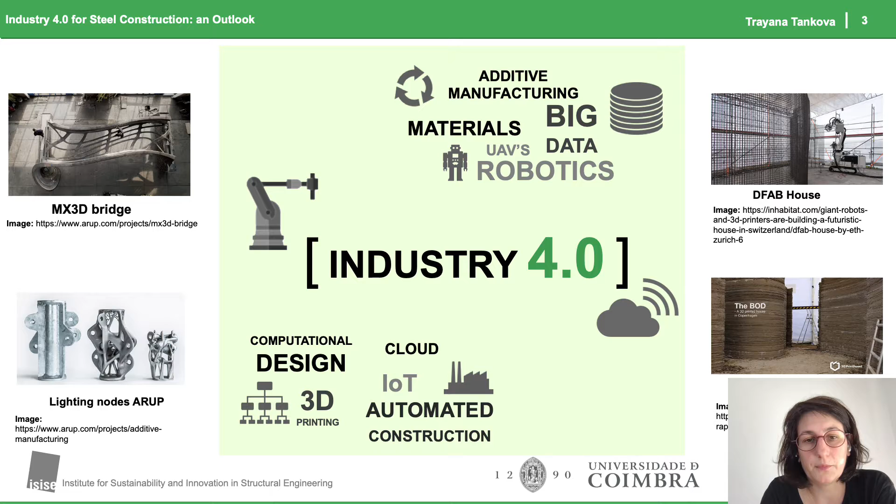Previously, we had work from Arup, where they showed how a conventional piece can be optimized and executed using this new technology. We have the digital fabrication in Zurich, where they also try to incorporate the robots in construction. And we also have several examples of 3D printed concrete structures.

We do also have building information modeling and digital twins, which allow us to have the three-dimensional model of the building, help interaction between the different specialities, and help avoiding problems in this interaction. This is also very useful at the construction site, where the teams can see how things can be executed, and this can be coupled with virtual reality, which is already available.

For example, from Trimble, where you can see the on-site progress of your building using this virtual reality and augmented reality. We do also have the possibility of parametric modeling, where we can easily change the length and height and whatever parameter we would like in our model, and in this way optimizing the solution, or introducing changes at any time of the process.

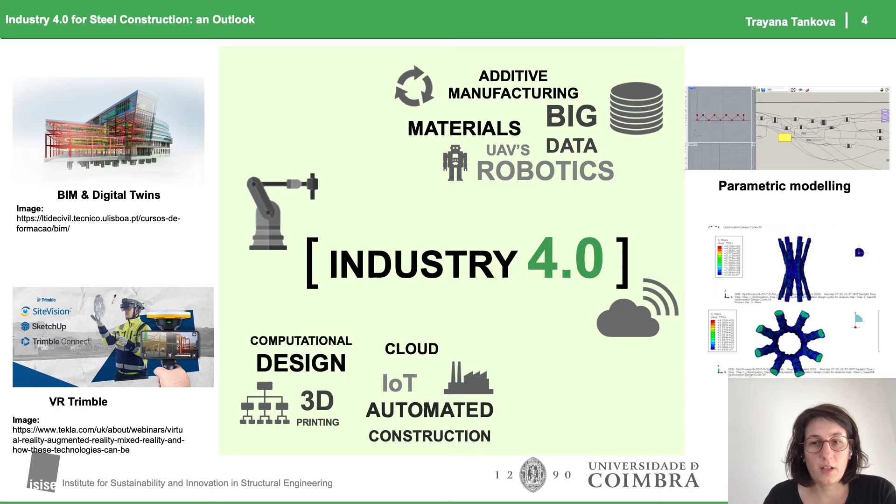However, construction still lacks automation, and there are several reasons for that. One of these is that we're working with flexible geometries. Each building is unique. It is a tailored solution, and the whole process is built around that. This building also changes its location, so it can be built anywhere around the world. So these two together make it really impossible to compare, for example, with the automotive industry, where there is a certain location where you produce the same product several times. So this is a really big difference for automation.

Another problem is that construction is a large scale product, and the current technologies may not be applicable to this scale. And also, since it's a tailored solution to the requirements of the investor, many times we have last minute changes, and we need to be flexible to respond to these changes. And if we have a production line which is doing all the same, it doesn't fit with these last minute changes.

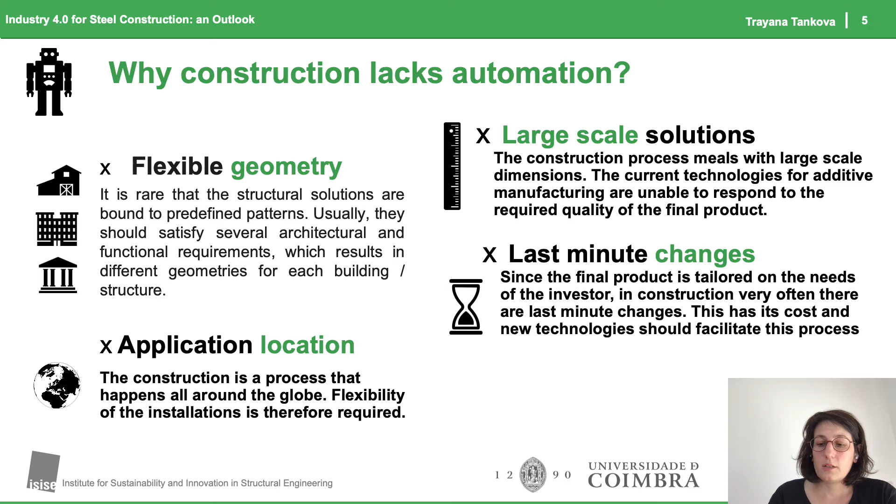So we believe that additive manufacturing can help solve some of these problems, since we can produce as much as we need. This can help to reduce the energy to produce the piece, and it can help to reduce the scrap, because we can produce as much as we want. Since it's automated production, it can improve quality. And as you know, when we have large scale and complex metal parts, for example, complex steel joints, since they are mainly fabricated manually, this requires more supervision and more effort.

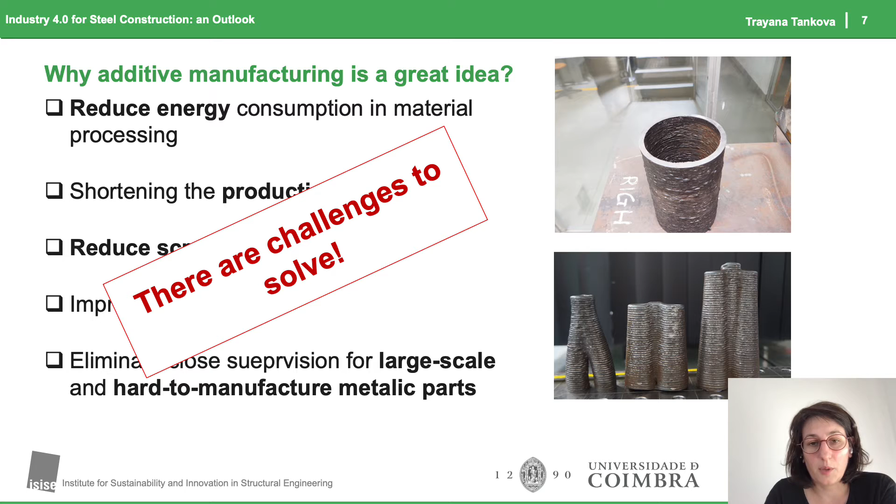However, there are challenges to the adoption of additive manufacturing at its current state, namely what are the material properties and how exactly we're going to produce our parts. So this has been our motivation, and here at the University of Coimbra, we have created an additive manufacturing lab where we try to respond to these challenges.

And what we have been developing is a novel workflow where we want to have a single-step design-to-final-product procedure, which ensures quality, productivity, and economy. This design process includes existing software products for the design and modeling of our piece, as well as for its automatic production and production control.

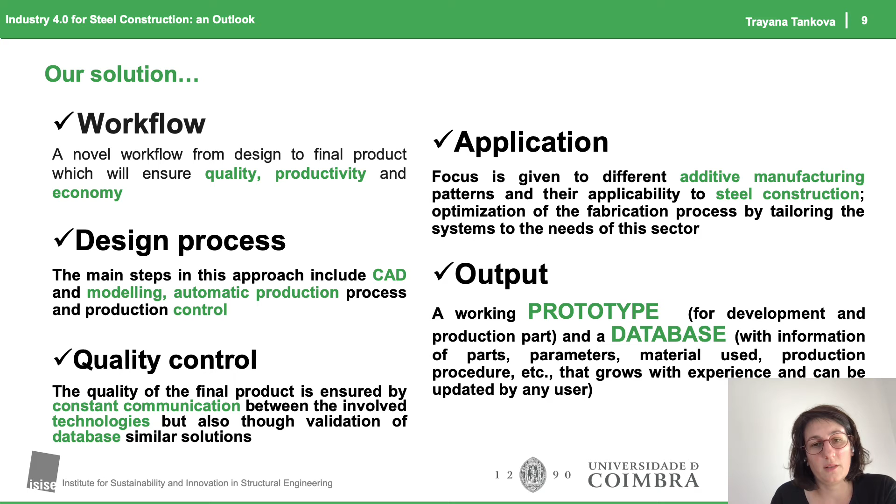An important part is the quality control, which we believe should be ensured by constant communication between the different technologies that are involved in this process, and also through validation with a database which stores data of previous attempts. And this is done having in mind wire and arc additive manufacturing for steel construction. And as an output, we would like to have a prototype and a database which has this relevant production information.

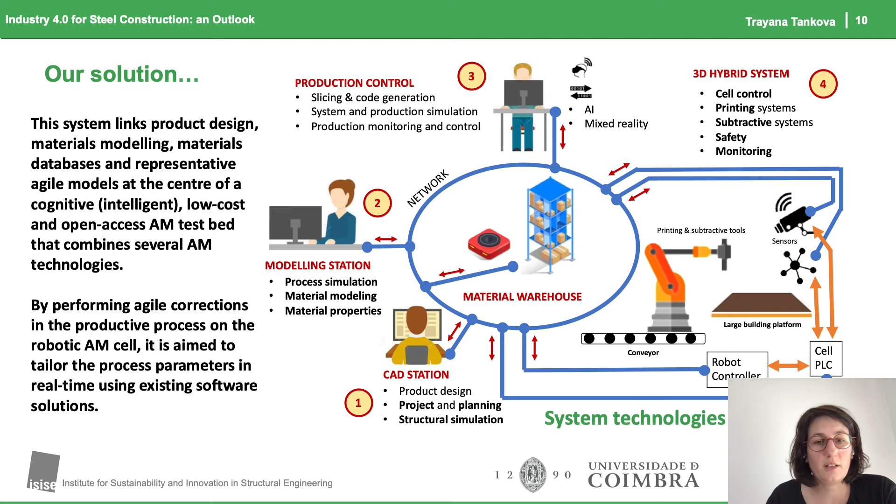So here is our workflow chart, where we have all these stations and they are all linked together. Here the CAD and modeling station refer to the design process, whereas the production control and hybrid system refer to the execution of this piece. And here we have a real system, and the production control is ensured through a digital twin that is exactly the same as the real system, and it is used to anticipate problems, to see how the piece will be produced, and avoid trial and error, repetitions, and loss of material.

So we have two robots. One is for wire and arc, and the other one is for LMD. At this stage, we are focusing on the wire and arc. However, it is intended that both will use the same software and work exactly with the same process that was shown before, with a different process at the end.

So here we have the ABB robot that is placed on a linear track of 5 meters so that it can cover large areas suitable for steel construction. We have welding tables on top of which we produce our pieces. And for the wire and arc, we use a Fronius welding machine with the cold metal transfer process, which has been proven to be more suitable for additive manufacturing due to the lower temperatures.

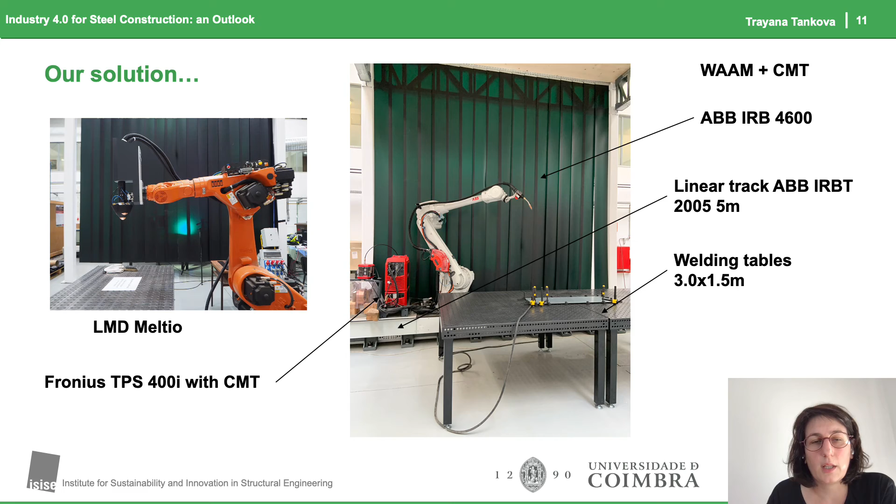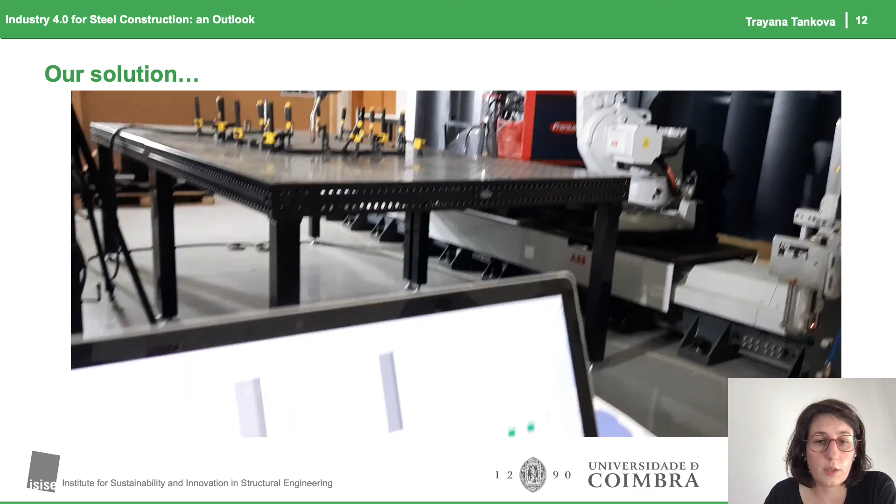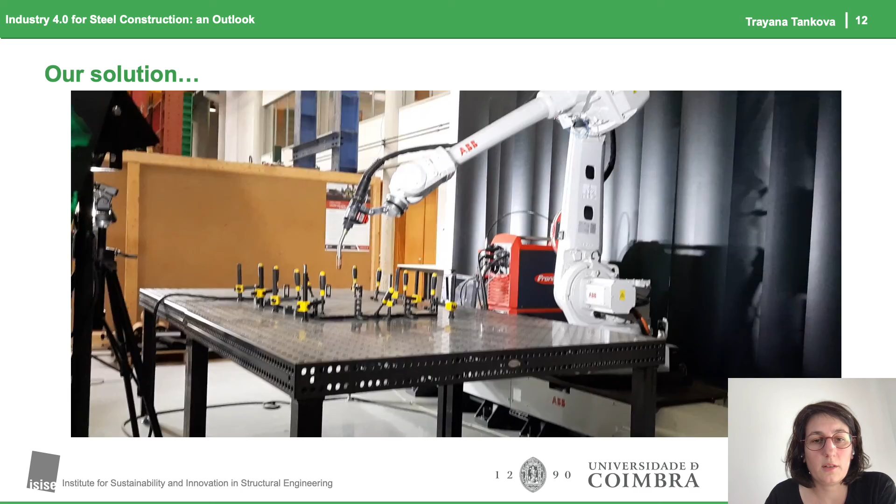And here there is a demonstration of the digital twin and the real system. As you can see, they work exactly the same. As previously mentioned, the digital twin is used to anticipate problems. It can work simultaneously with the real system. It can also work faster so that we can see what is happening, and we truly believe that this is a sustainable way of producing, so that we only produce when we need to.

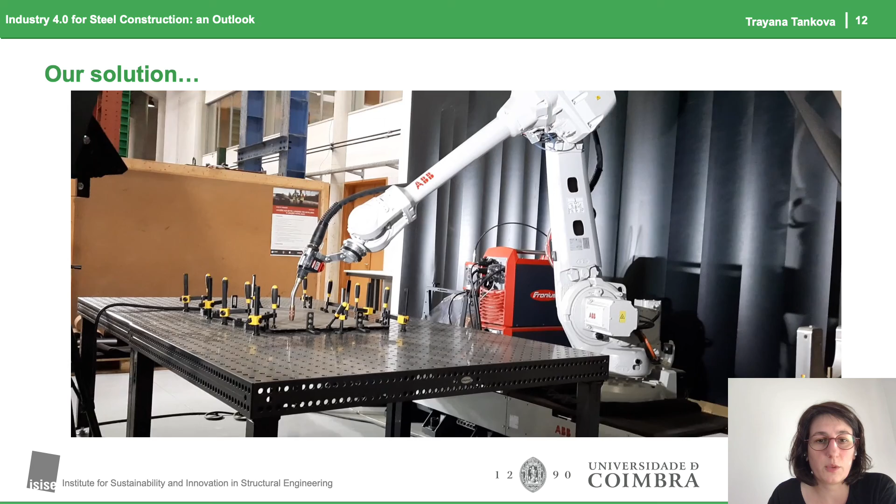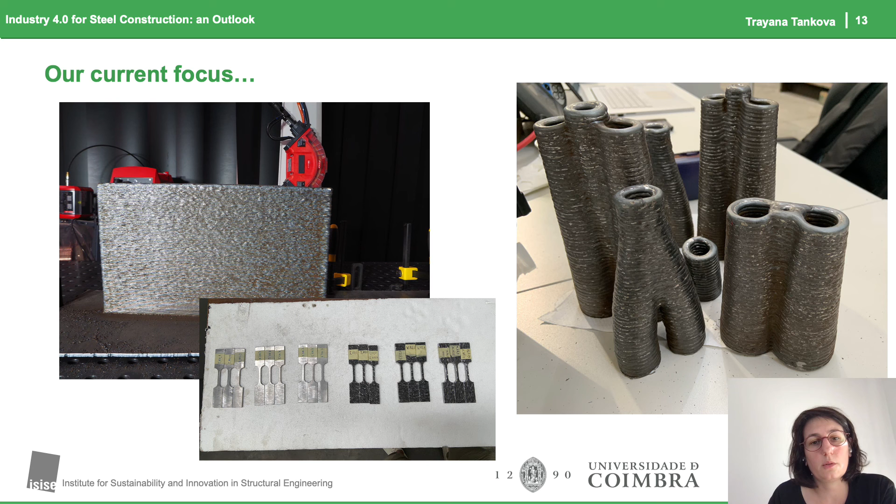And our current focus is on two objectives. One is to characterize the material properties so that when we go to the design stage, we know what material we are dealing with. And the other objective we're trying to focus on is complex geometries, where this is associated with the robotic movement and the optimum way to achieve a complex shape.

So in conclusion, I'd like to mention the several possibilities for automation that currently exist for steel construction. Maybe we are not yet there, but for sure everybody is interested in digitalization, and we're going in this direction. And we believe that additive manufacturing has great potential for this future application.